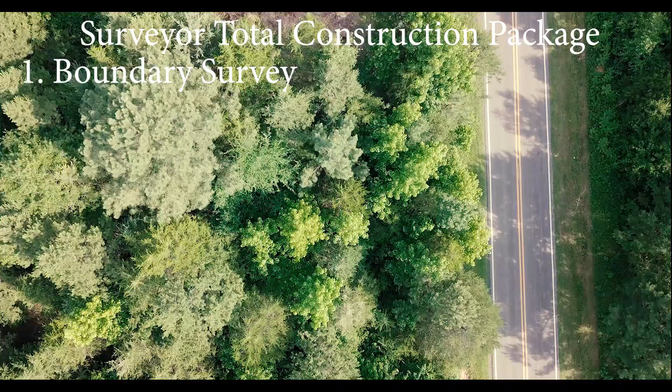So obviously in the beginning you want a boundary survey, which is number 1. Basically this is flagging or putting in stakes on the property lines, establishing a basis for the house placement and the location for septic and drain fields, and other improvements, with respect to all the property lines that are on the deed. So that was number 1.

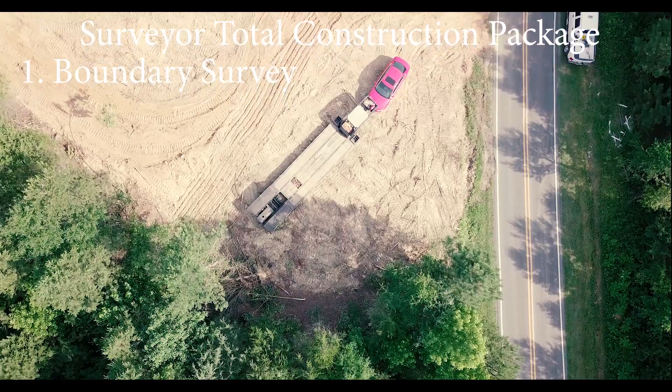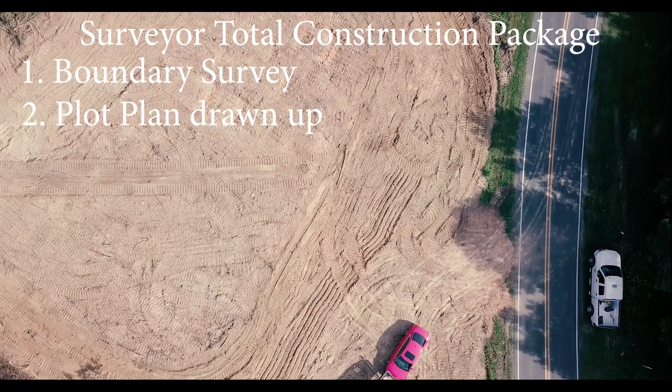Then number 2, basically he gives you a plot plan, which is a map that shows the proposed house and where you want to put that. Normally you give them the foundation plan, and then they draw the drain field for the septic or well or any other proposed improvement, any detached buildings, that type of thing, in relation to the property lines, any setbacks, easements, and other restrictions. This is something they provide for you as well.

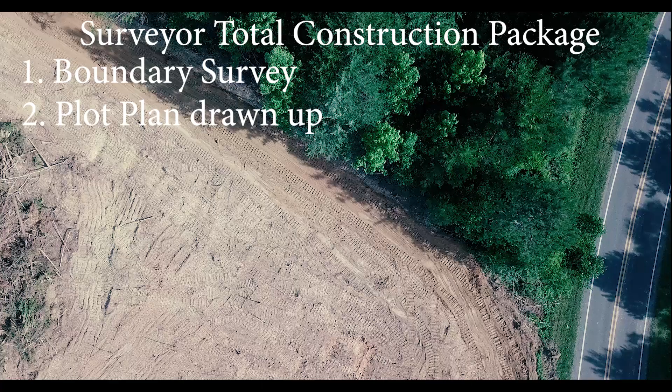Normally a plot plan is actually not super expensive, only $100 from our surveyor, and basically since we already had one, we saved $100 on that section. The reason for that is we already had a previous plot plan that was done by the first original surveyor, and since we have the tools, we just took that into Adobe Photoshop and Adobe PDF, and you can select the individual lines, remove what you don't need, and put in a house on your plot plan. So there are ways to definitely save money.

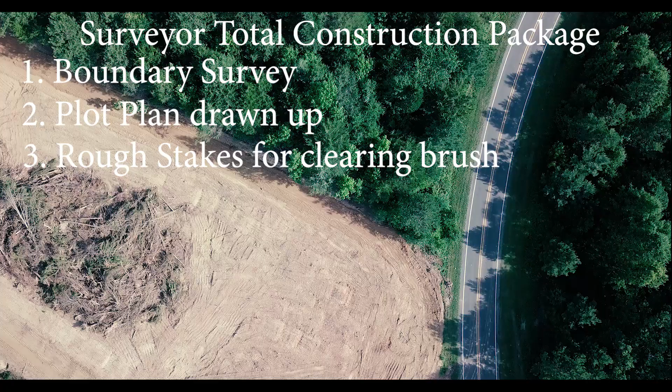The third thing that they go out and do is they put in the rough stakes. This is the stake in the field where your proposed house building is going to go, they call it the house building envelope. Typically just 4 stakes, regardless of how many corners you have, because again, rough clearing is just involving removing brush, removing trees, removing roots, that type of thing, so you're going to run over these stakes anyways.

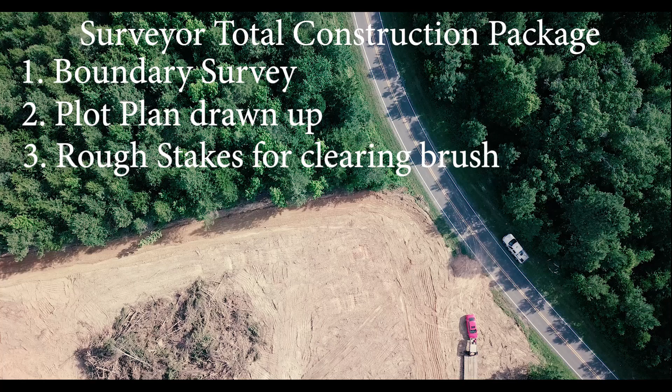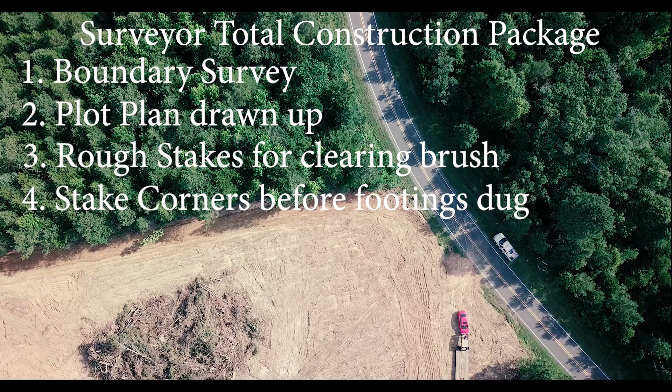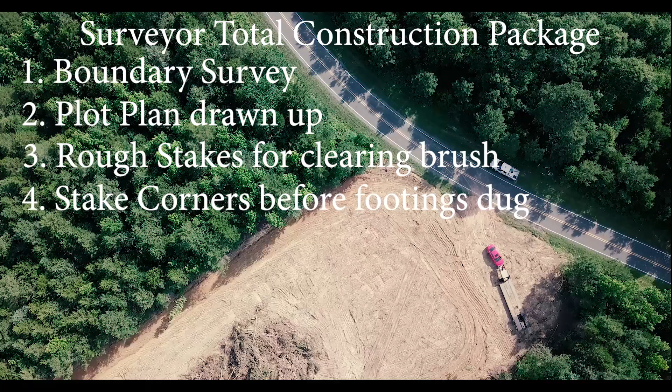As long as there's plenty of room on either side of the house, in general it's recommended about 30 foot on each side. We did 40 foot and 50 for the backyard, just so we can have a little more room to play around or have a backyard for the kids. This is just to indicate where we need to clear the trees and brush, and have a rough grade. So that's the third time they would come out to your house, and keep in mind each time they come out it's $250 or so. If you have a lot of corners, the next stages require a little more money, just because they start to get more exact on the placement and corners, so that your concrete guys know where to put the footings.

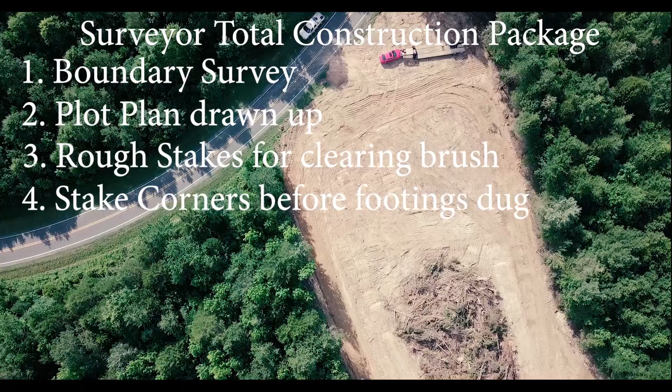So the final staking is basically to stake the exterior corners of the proposed foundation using our foundation plans. Normally the client provides this to the surveyor, so you have to purchase some plans, and the footings will be dug using these stakes. Once the footings are done, the stakes will be removed.

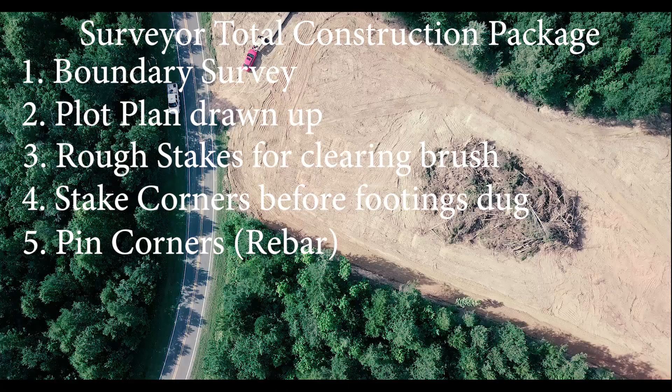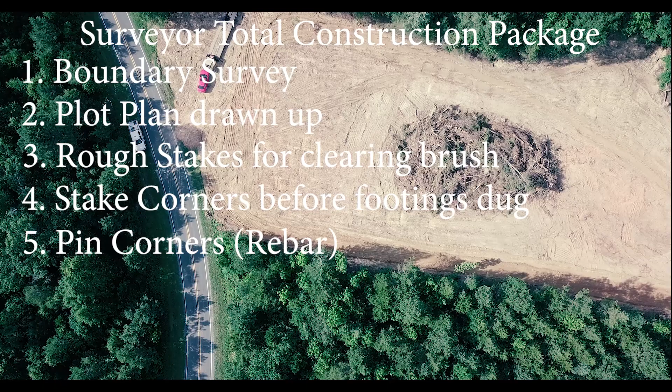So again, the surveyor needs to come out a 4th time and pin the footings. Here, he uses concrete nails in the corners of the proposed foundation, so the brick mason and contractors can use these nails to begin construction. This marks out the exact corners where they need to pour the footing or start the brick, whatever type of foundation you're doing.

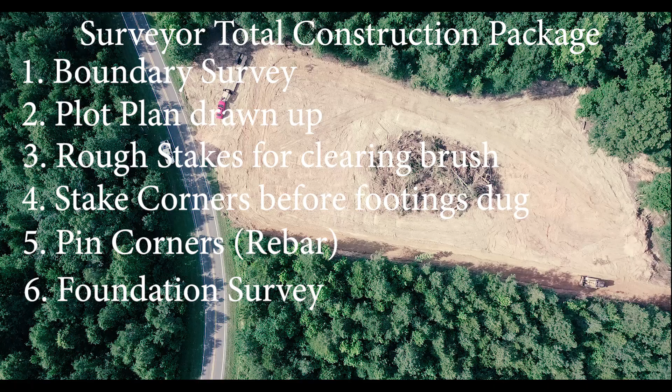The 5th time they need to come out is to do a foundation survey. They will locate the new foundation and provide a survey map that shows the foundation as it relates to the property line. Basically, the banks and municipalities require this foundation survey before allowing us to move on any further, just to make sure we didn't screw things up and put the foundation where it's not supposed to go, in easements or anything like that.

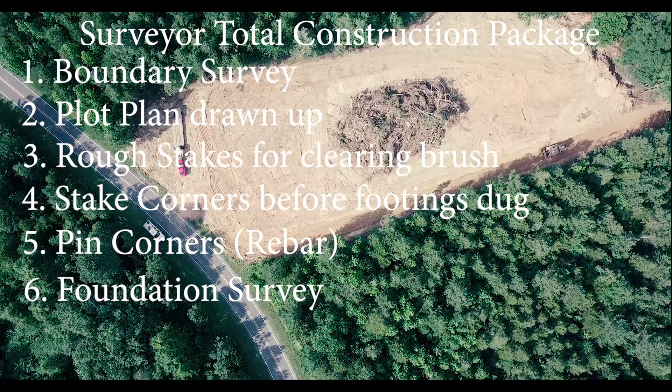With a 3-acre lot like ours, this isn't a big issue because we're somewhere in the middle and it's not going to get in the way of any easements or neighboring lot.

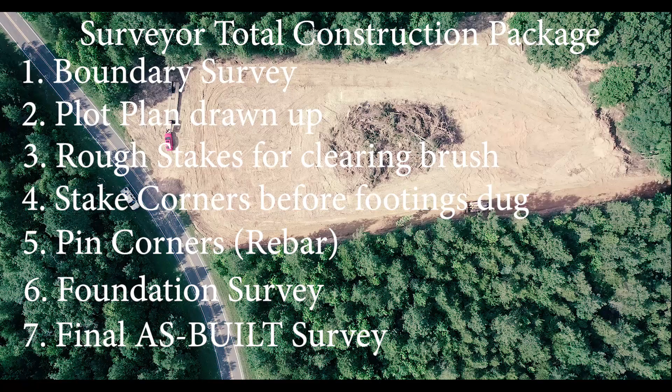Then the final survey, after the house is completed, the surveyor returns again, so another $250 later. After everything is complete, including any outbuildings, garages, improvements, driveways to the property, anything that's on there has to be shown on the survey. The banks, the town and everybody require this final survey before actually giving you a certificate of occupancy.

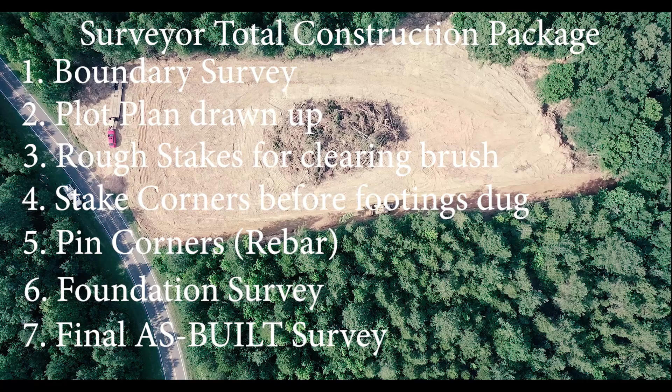Again, this can get pretty expensive, and as I said, the boundary survey fee depends on how big and how long your property is. If your place is overgrown or has too many trees, they will just keep adding. It's pennies per linear foot, but if you have many linear feet, it goes from 50 cents to 75 cents. If you have 700 feet on one side, you can imagine that's already $300, $400 just right there.

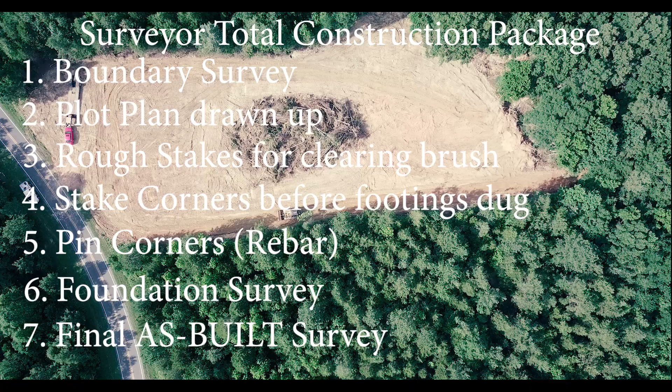So then the plot plan was $100, the rough stake is about $250. Final staking is $250 to $350. To pin the footings is $250 to $350, depending on the corners again. And then the foundation survey is $200, and the final survey is $250.

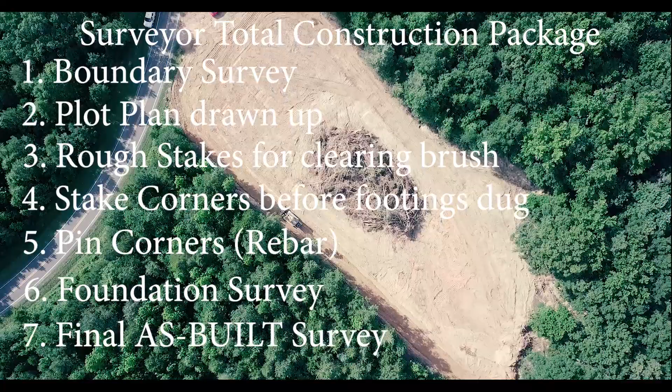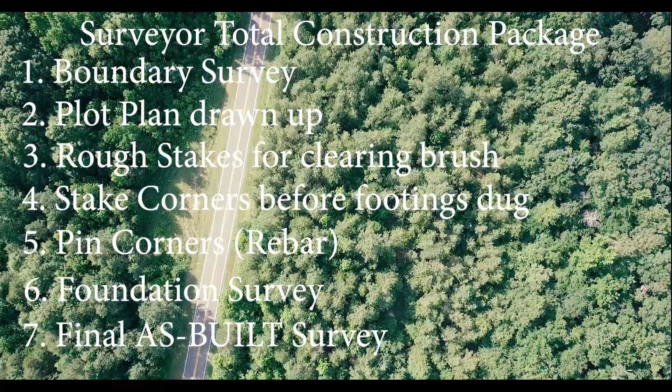Now, as always, I'm going to mention things that will save you money, and some of those include doing the rough stake yourself. If you have plenty of property, or even a small property, if you know just about where the house is going to go, you can do the rough staking yourself, because at this stage you're clearing so much area for the contractors to get in and for trucks to make deliveries, that there's quite a large margin for error. So there's definitely room to save a little bit of money, up to $250.

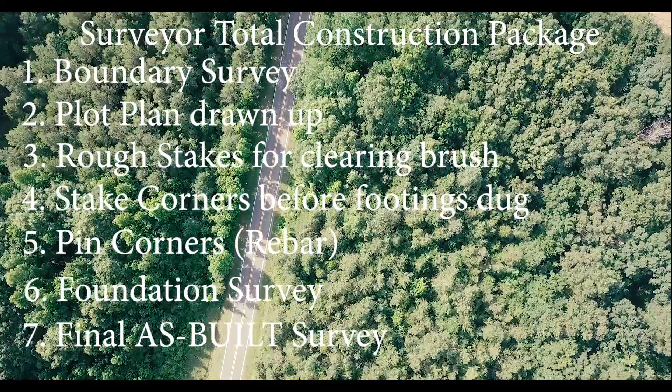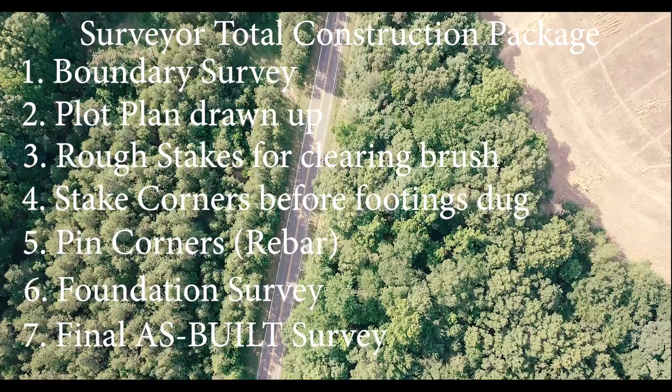If you draw your own plot plan beforehand, that'll save you $100. So that's at least $350 saved. I definitely wouldn't recommend doing any of the others on your own, including any of the pin staking or anything like that. So you definitely want to spend the money where you need to, and the foundation is definitely going to be one of those places.

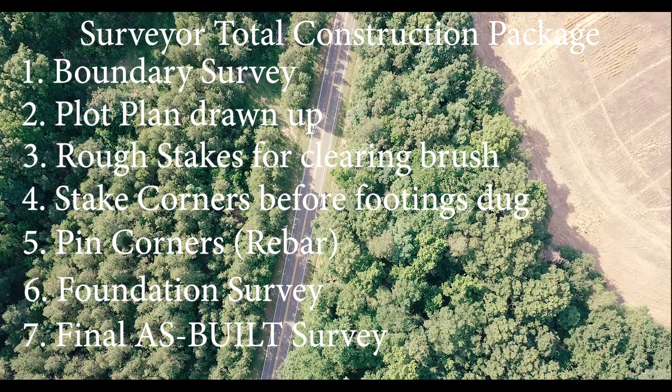Anyway, guys, I know this is a pretty long video, but I wanted to give you some exact numbers, figures, and things that we went through and how to save a little bit of money. This way you guys can get a pretty good idea of what you need to do.